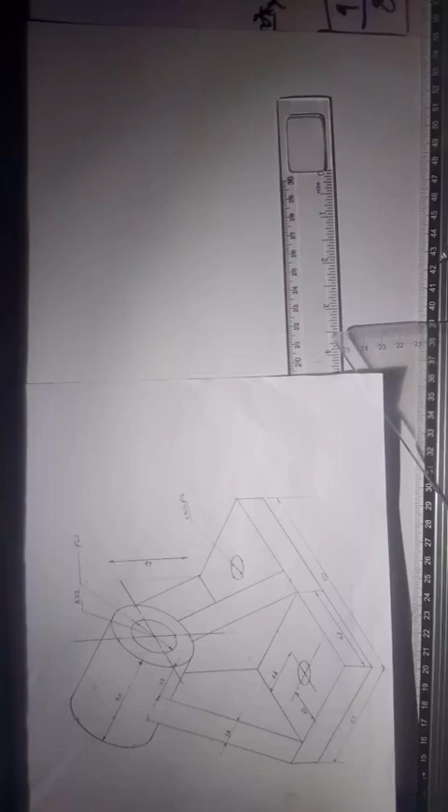So we are doing the schematic drawing of this. First thing for us to do is take your T-square. So this is your T-square. This is your angular square, set at angle 60.

So we'll be using angle 60. So this is angle 60 here. First thing for you to do is place it at any point here and do a construction line like this.

Can you see this construction line? So do the same thing - the same construction line like this.

So you can see that from here to here is 6.2. You take your ruler here, you measure this 6.2 here. So I'll mark this space from here, 6.2.

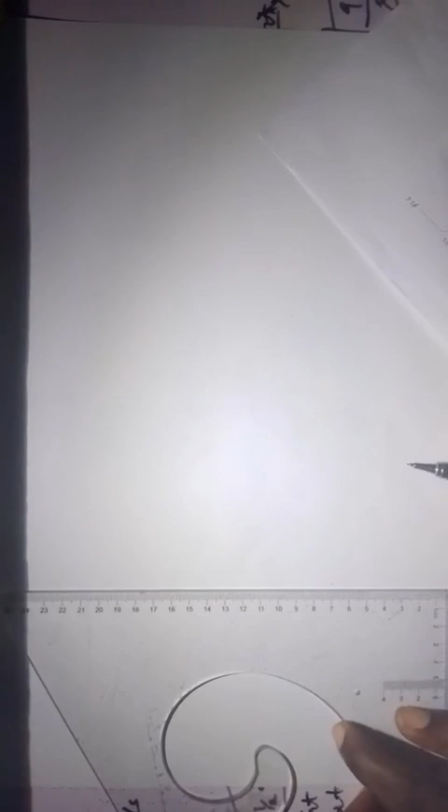So after that, you take your angular ruler, you do a straight line, like a very straight construction line, and also do like this. Do like this, so you can see that the height.

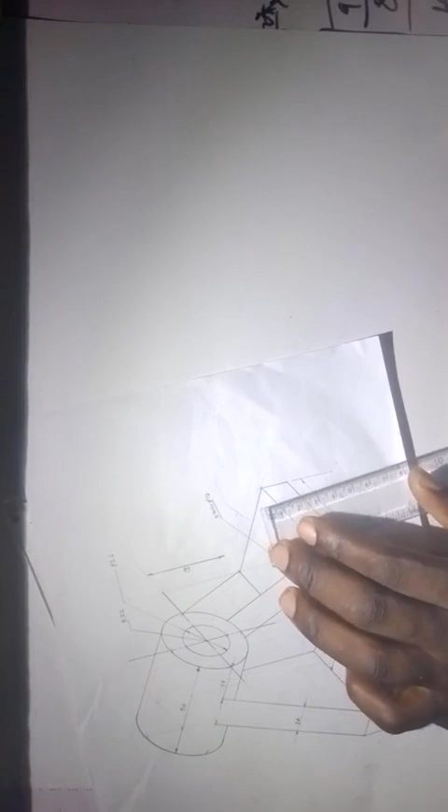So you can see that the height here is 16. So the height here is 16.

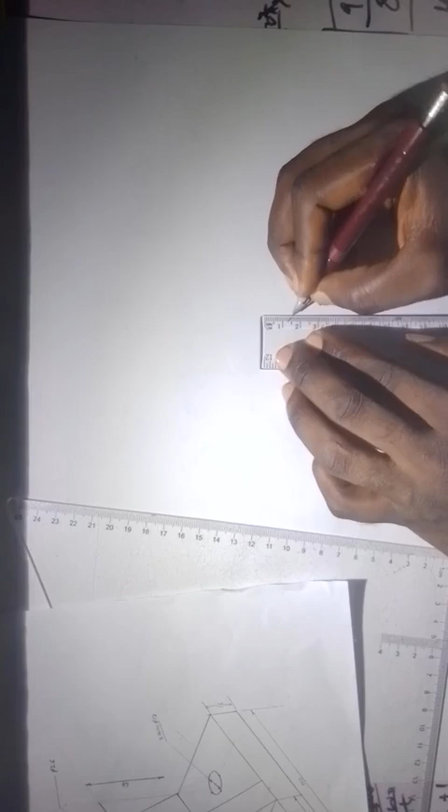So we'll now be using 1.6. Can you see 1.6 here? So I'll use 1.6, I'll mark this space.

So mark that side. Next thing we should do is take a ruler, get this one here, do a straight line like this. So turn to the other side, get here, do a straight line like this.

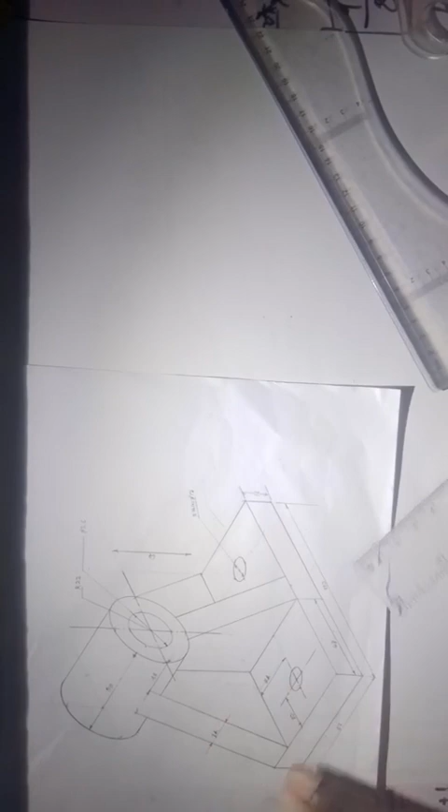So when you are done there, the distance from here to here is 14. So use 1.4 - you take here, you measure 1.4 here.

So you can see that the distance from here to here is 48. So the distance from here to here is 48. So you take here, you measure 4.8.

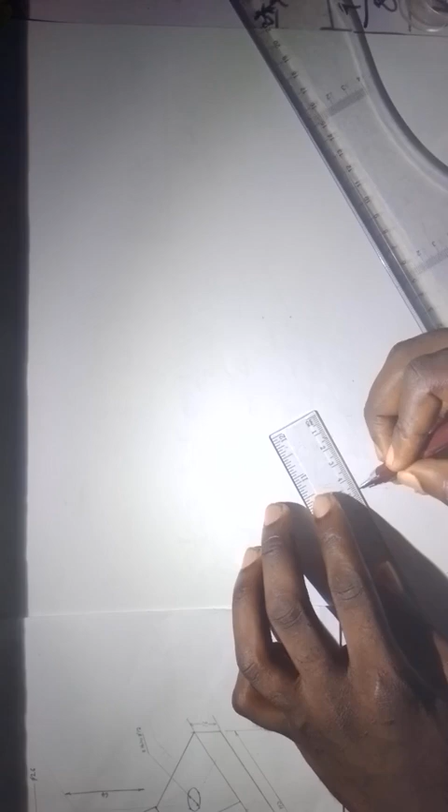Can you see? So this is 4.8. So after you are done there, you take your angular ruler, you do the left side.

You do a construction line like this. So you turn to the other side, you do a construction line like this. So after that, you take this one, you do angle 90 straight line like this.

So if you are done with that, you can extend this one to the other side. So turn this one to the other side to connect this one like a box.

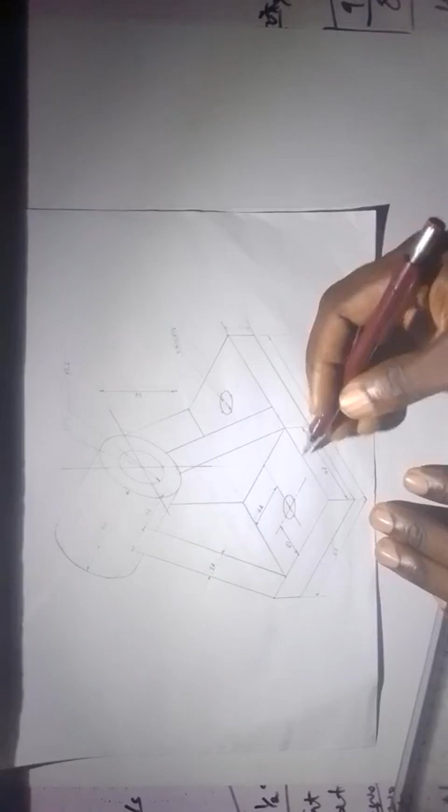So are you done? If you are done with that, the next step for us to take is that from this place to this place is 14. Do you get me? From here to here is 14.

So what we will do is we need this middle here, and this middle here is the middle of this place. So you take your ruler, you measure 14 here, that is 1.4, so you mark 1.4 here.

So the half of 1.4 is 7, so you mark 7 here. So when you are done with that, what will you do next? What you do next is...

You take your measurement ruler, you extend this one to this place, you project this to this place, bring this one, project this one to this place. So after that, you project this one as angle 90, straight perpendicular to this line.

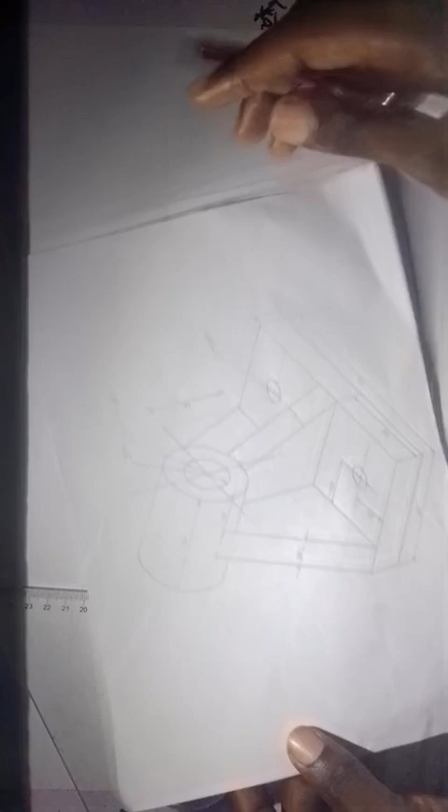So project this one to this place. Now you are done with that. Now you can see that the height from here, from this ground to this place, is 64.

You can see, so use 6.4. So I can decide to mark my 6.4 here, so this by 6.4 here. Can you see it? So this by 6.4. So I will mark by 6.4 in this place and mark it here.

So when I mark like that, I will project this one straight down. I will project it down. So I think I'm done there.

Now you can see that from this place to this place is 18, so I'll use 1.8 from here. For me to do that, I'll just place this one here. So I will not start from here. I'll measure from here to here, which should be 1.8.

So if I'm done with that, what I'm supposed to do next is take this thing and do like this. I will cross this line to a center line. So you guys know it's long dash, center line is long, small dash, long, small dash, long. So this one will cross for the circle: long, small dash, long, small dash, long.

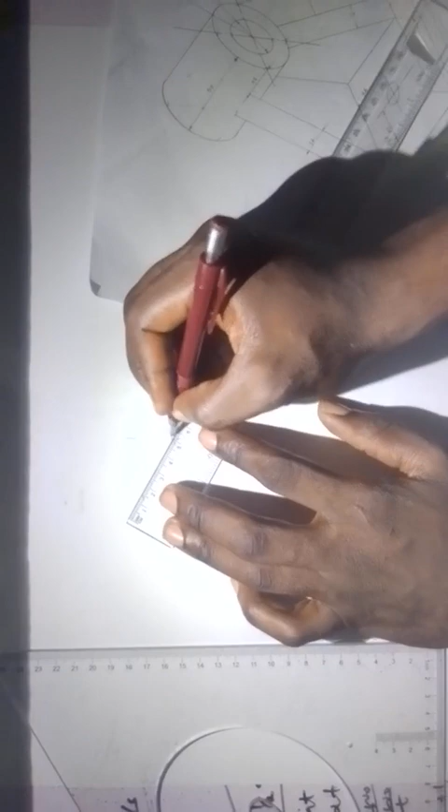So when I'm done with that, you can now see that from this place to this place is 50. So I will take my ruler, I will measure, I will start from here, I will put my 50 here, and I will mark this place. So when I mark there, what I will do now is the same thing I did there, I will do

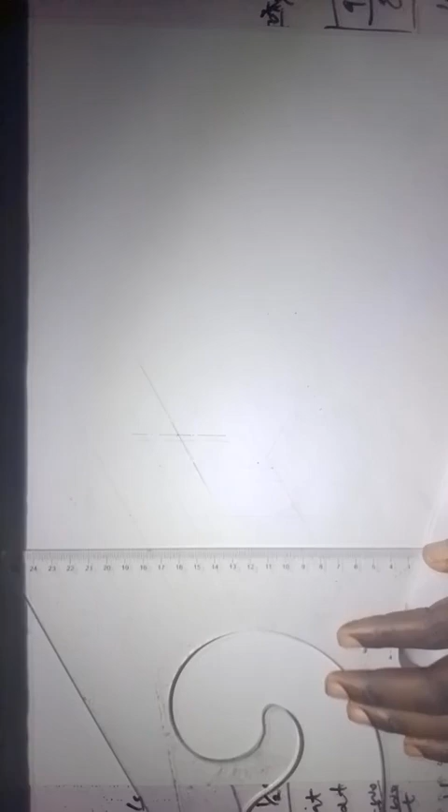a plus like this, cross, something like that, and do this one like this. So now that one is done. So I'm done with this one, I'm done with this one.

So now the next thing for me to do is, you can see that the radius they give me for this bigger one is 22. So I will take my compass, I will measure radius 22 here and put it down here.

Can you see? So I will come here, I will mark this, I will mark this cross, and this one. So also I'll apply it to this one. I'll mark this one vertical, and line.

So when I'm done there, the next step is taking your French curve. Now that is a sheet there. You are not using the four centre method. You take your French curve. You look at which one is the best to put it in.

You look at which one is the best. So you will test it. You will test the French curve. Which one can you use?

So you will make sure that all this. Now you can see the one I suppose to use is the biggest. I will use it because this thing is showing here. That's what it's showing here.

So the next step, you want to do the other one. I will first take this thing here. So to be accurate, take this here. Do this. Do the other one here. This one. So if I'm done, I will project it to this line.

I will look at that line I projected. So I've seen it.

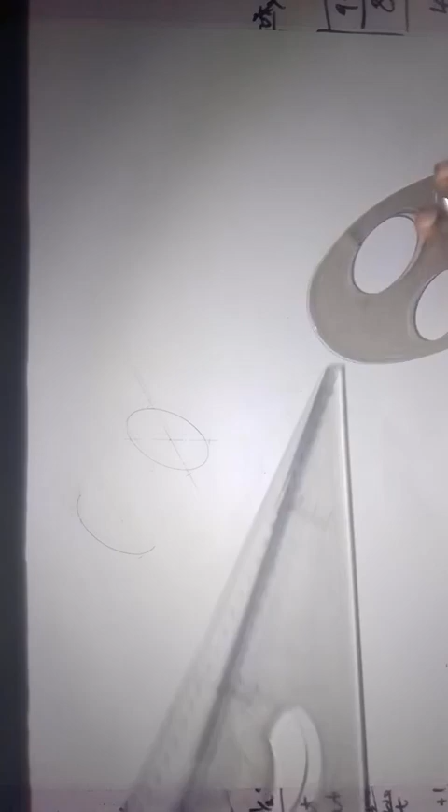So I've seen the projection lines. So after that, I will pin this one to connect it together. Can you see? So I've connected that together.

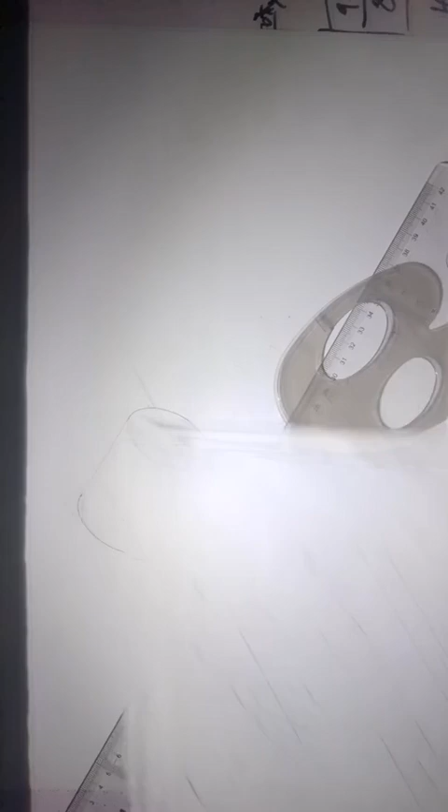So this one now, I can't connect this one yet. What I will do is, I know that the space given from here to here is 18. So I will take my ruler, I will measure 18, so 1.8 here. Can you see? I will mark here. And you know that from here to here is 14, so I'll use 1.4. Mark here. So what will I do? This is what I'll do.

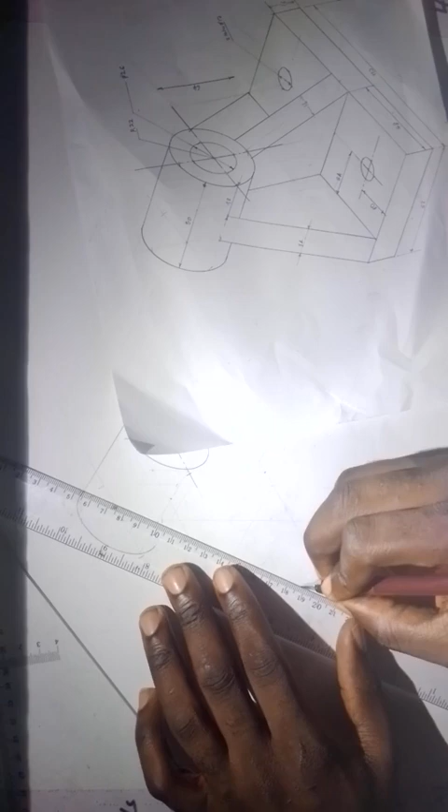So what I was supposed to do is, you know, the edges here, I will connect this one straight. So this is it. I'll connect this one straight to this one. Likewise, connect this one straight to this. So if I'm done, I will take my this way, so shift it to this side a little bit.

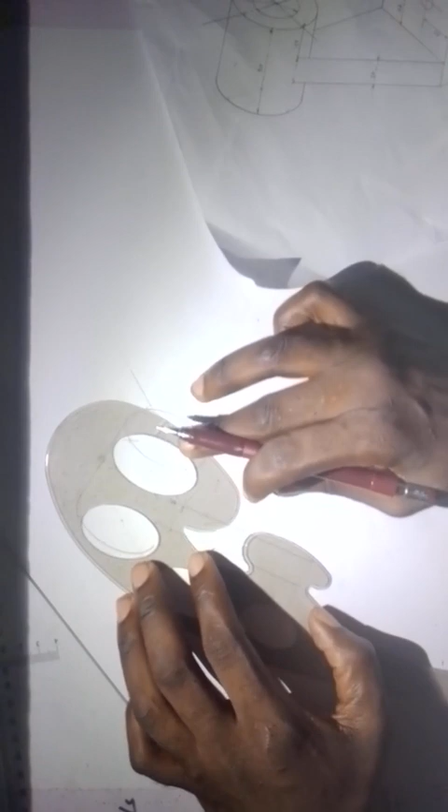Let me see the lines.

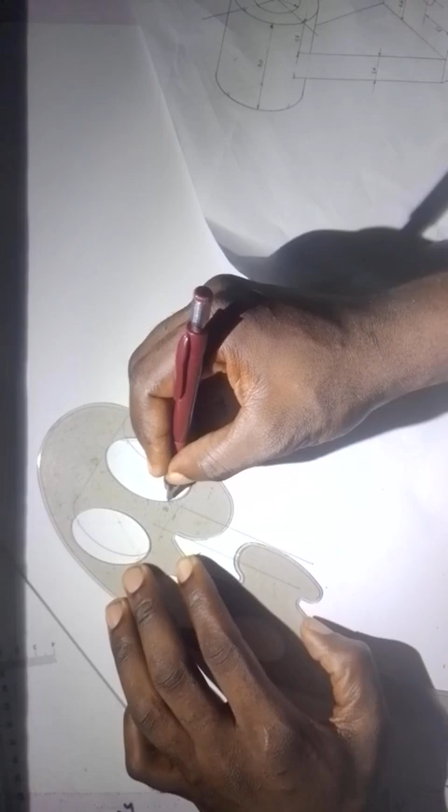So I think I'm done with that. So I can now join this. I'll join it like that.

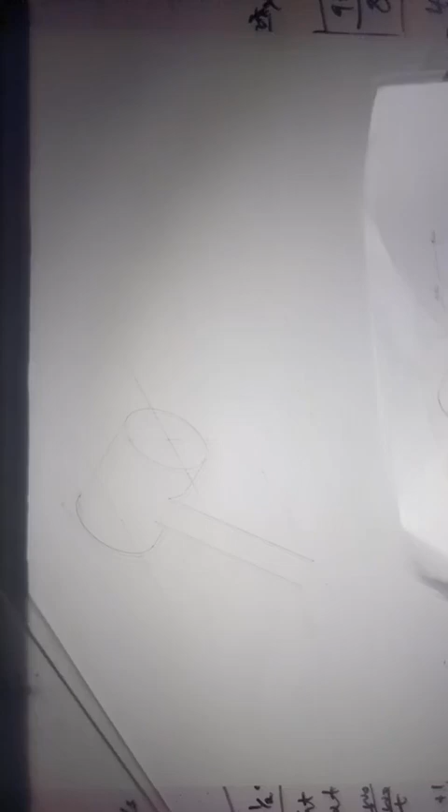So the next step is from here to here. How will I get it? From here to here and from here to here. Now it's so easy, so what I'll do is take this, extend it, and put it like this.

So I've marked that side. I know that it's 7, 7. I'll just mark — I know from here to here will be 7, make it 14. From here to here is 14. So remember that I connected it here.

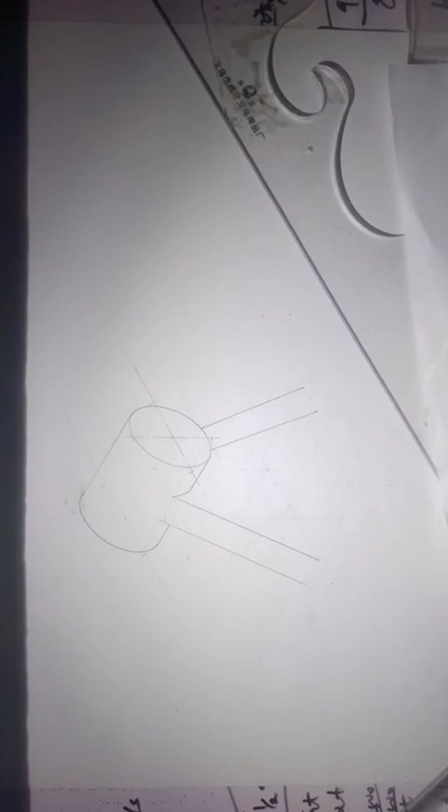So what will I do here? I'll just bring this one, join this side, join this side. I think nothing much on it. So let me not take it as the main side — this place I'll take it this side.

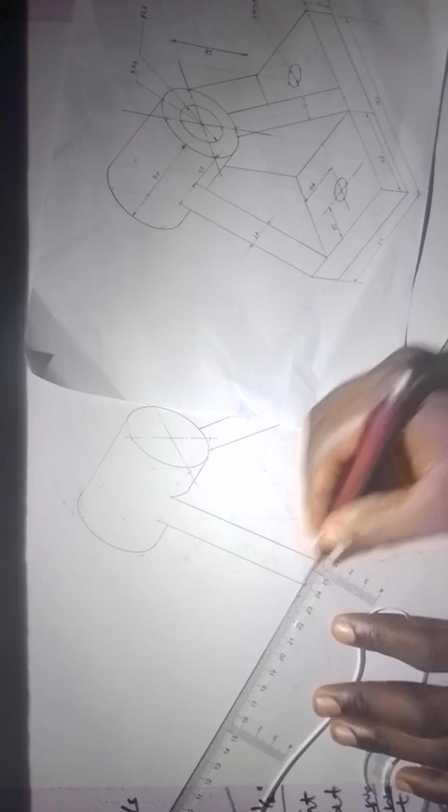So — this side, sorry, there's a little mistake. So I've worked out with it.

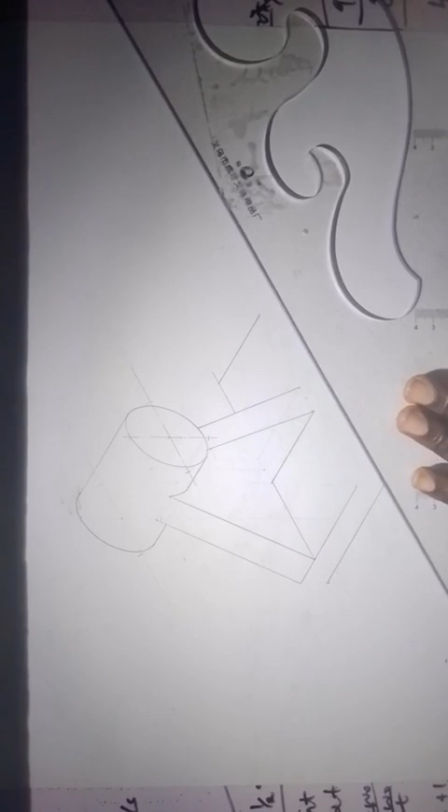So we'll be taking the outline now. One that is supposed to take. So when you are done with that, take this one, take this.

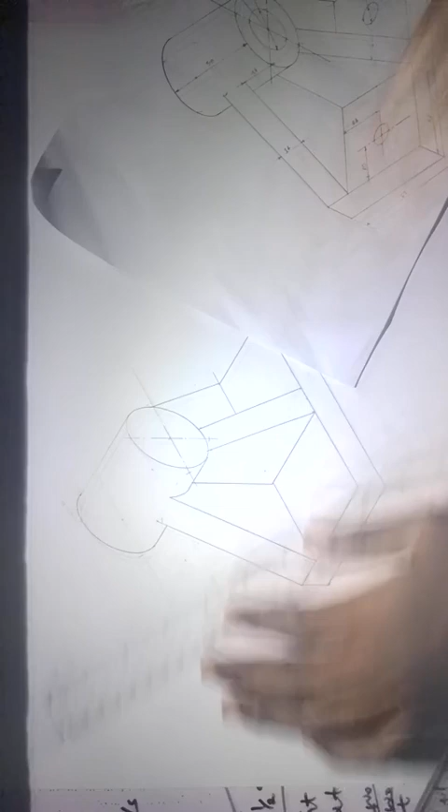So you can see this one too, the other outline here. So you can see that this one is connected to this center line, this one here. So you add this one to connect it to this one. Yeah, so there is what's left — you still have a little bit of things to draw here.

Now you can see that the inner diameter here is what? 26. So 26 divided by 2 is what? 13. So what I'll do is take your compass.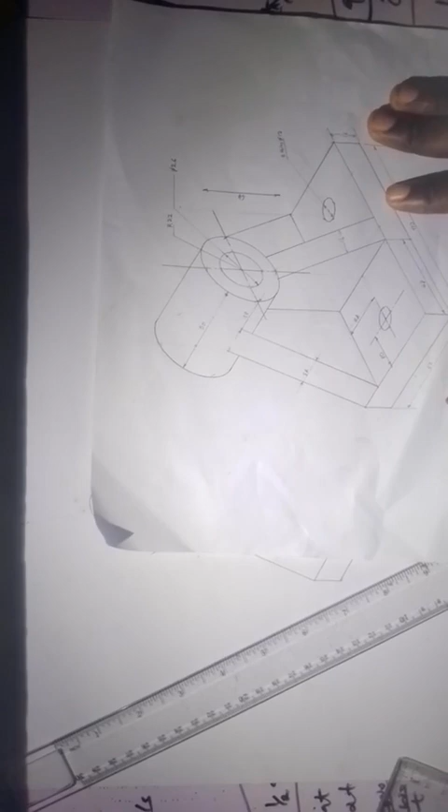So you now see what I'm doing here. You take the other French curve here. You can see that this one is too big, you can't use it. So make sure you are seeing this.

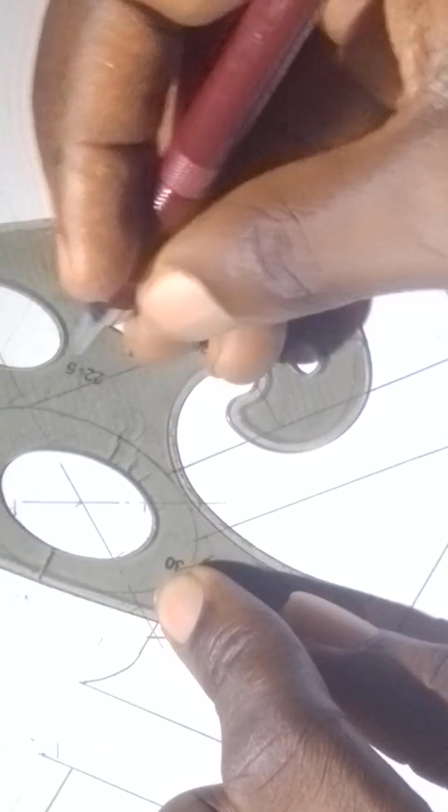You can see I'm seeing this arc. So you can see it. You can see that I'm seeing this space, I'm seeing this space, and as well seeing this one, and this one here. So what will I do here?

I will cross it. So can you see it? Can you see it now?

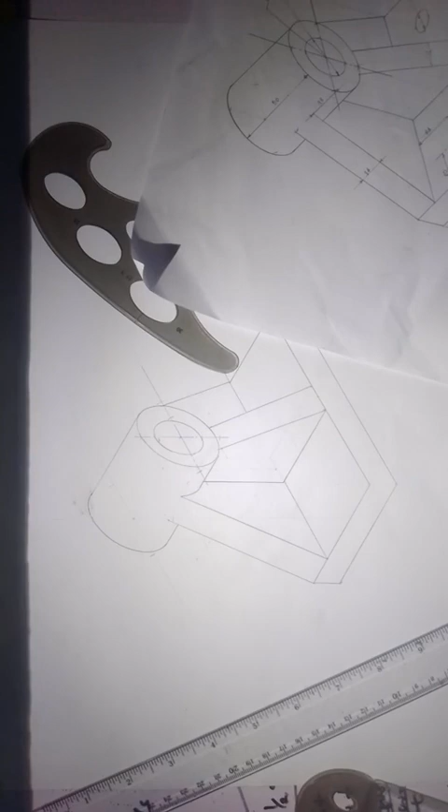So the next thing for me to do is that from here to here is what? 12, 20. From here to here is what? 20. From here to here is what? 24. So I will take my ruler.

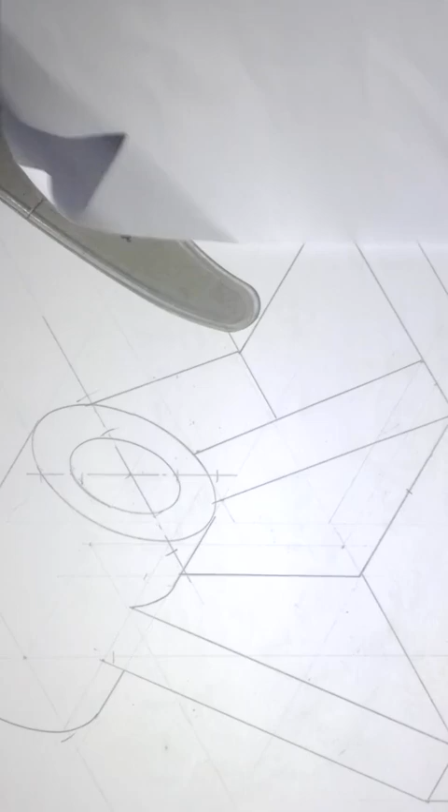So you can see I mark what? This is what? 24. And this one is what? This one is 20.

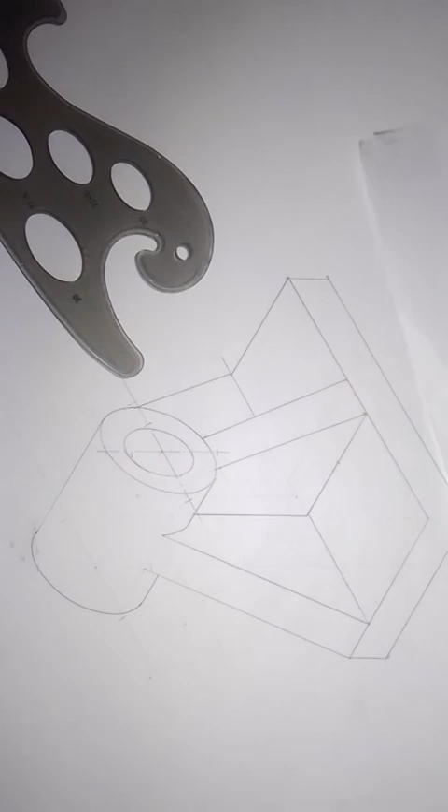So next thing I will take this thing here. I will mark this one to be 20 here, and do this one 24 to the other side too. Can you see? So this one here is 20. You need to mark.

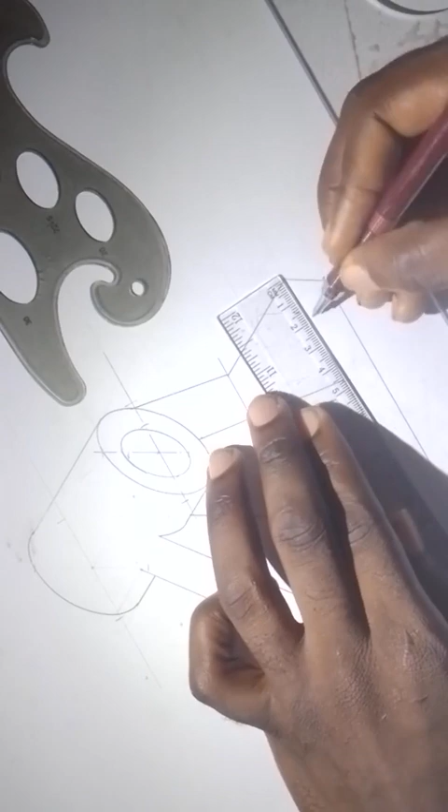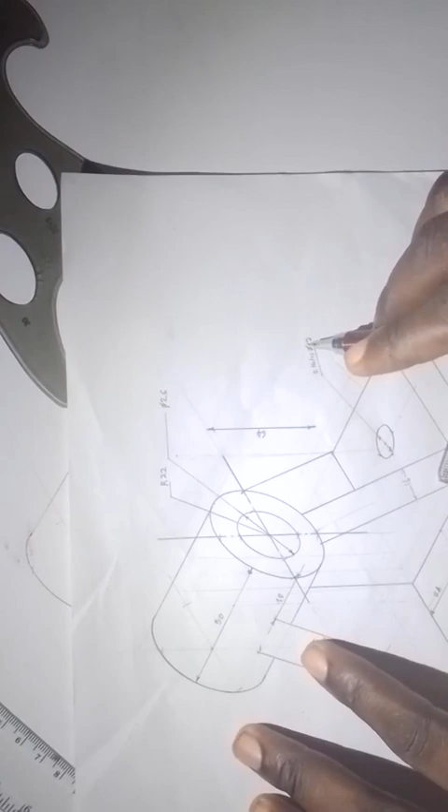So what we'll do here is shift this one to this place and do 20. So I think I'm done. Now the radius, the answer they give us is 12. So radius is what? 12 divided by 2 is what? 6. So I'll take my compass here and measure 6.

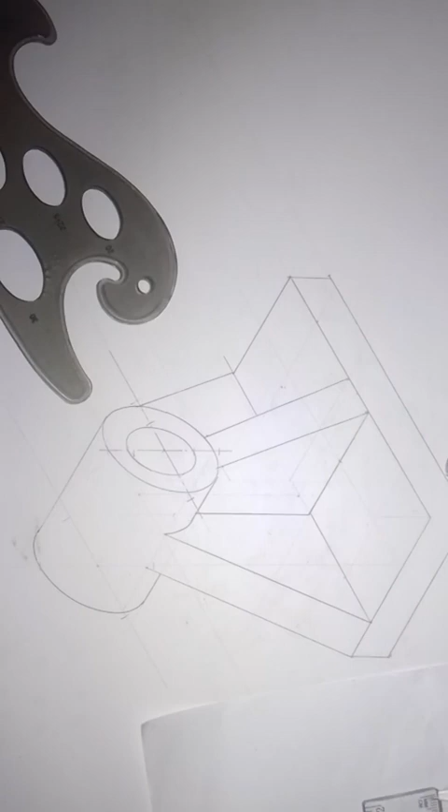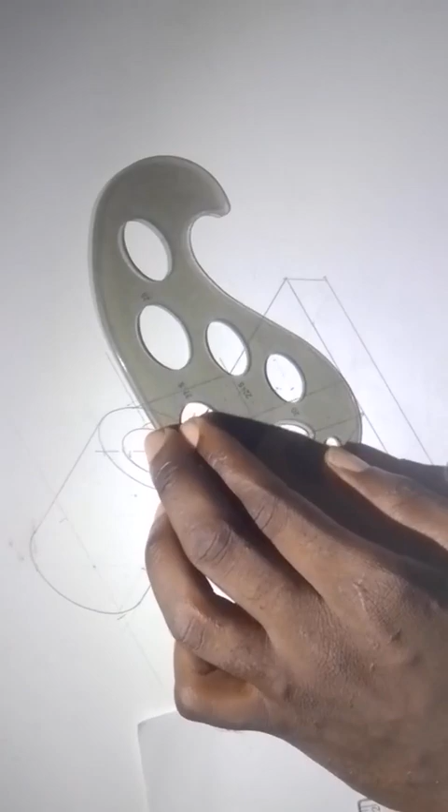So the same thing here. So when I'm done, you can see I will find the one that I'm seeing, this one.

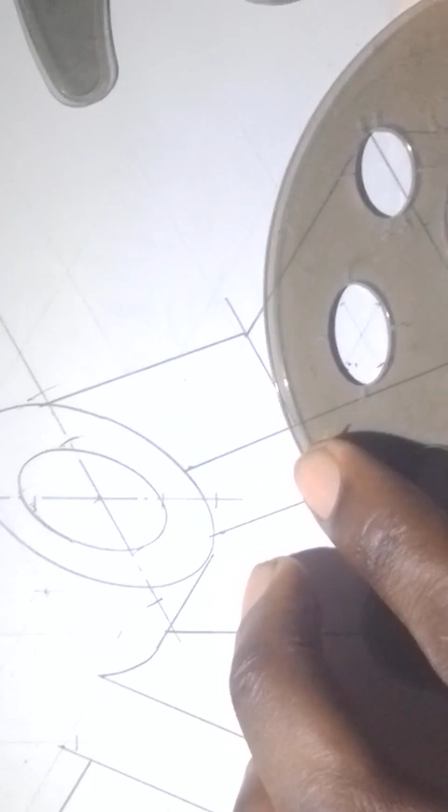I think let me use this smaller one. You can see I see it here, see it here, see it here. So I hold this one. Same thing here, I can see it here too. I can see it here. I can see it here.

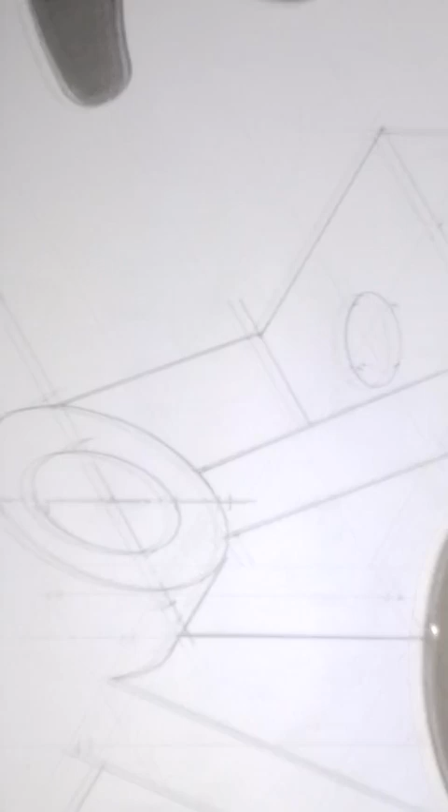So I hold this one. So can you see it? So this is what it's supposed to draw, and this is what it's looking like. Can you see it? So that is it.